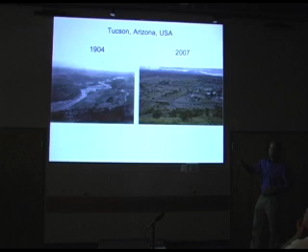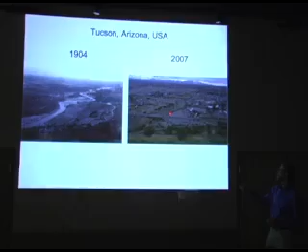That's changed today. This photograph was taken looking south in 1904, and this one is from the same vantage point taken last year. You can see we've replaced the once meandering year-round flow of the river with a dead and dry riverbed. We've killed the river. We've also replaced the sponge of the dynamic mesquite bosques, or forests of indigenous trees, with pavement. Over 30% of Tucson, Arizona, like most urban and suburban communities, is paved over with streets, parking lots, and buildings. But that only looks at the official pavement—it doesn't account for the large swaths of area where we've denuded the vegetation and compacted the soil so much that it acts like an adobe brick patio.

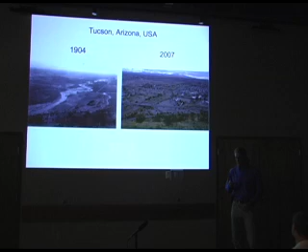So we get much less rain than you all—about a third of your rainfall. We get 12 inches of rain in an average year of precipitation, but we're lucky now if just a fraction of that infiltrates. We are literally dehydrating our watershed. We are creating the desert, because we're draining the water out of the system much more quickly than it would naturally.

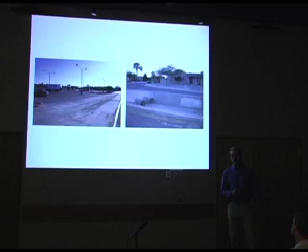So let's look more closely at the watershed. You can see the evidence that we are a hydrophobic society—we are afraid of water because we do everything we can to get rid of it as quickly as possible. A typical commercial development is 95 to 100% paved over. So now you've shed that water out of the system, and you have to invest in pumps and other infrastructure to get the water back to the system from which you've drained it.

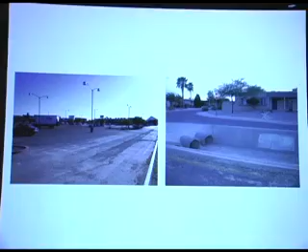Then in a housing development—not as lush as it is in Asheville—here you've got the home on the high part of the property, which is good so it doesn't get flooded. We typically send the roof runoff down a downspout, right past the vegetation of the landscape, into the street, and then into the concrete-clad drainage, and the guns of Navarone shoot the water right out of the system. So we've replaced what was a very vibrant, living system that did not rely upon outside inputs to irrigate and sustain it, with one that is utterly dependent upon human intervention.

It costs us $4 billion to construct that system, and $80 million a year to keep it going. The bulk of that money goes to pay the electric bill, because when you move water, you consume electricity. And because we get the bulk of our electricity from burning coal, we're consuming a half gallon of water for every kilowatt hour of electricity consumed—the huge invisible water consumption of our energy consumption. So if you conserve energy, you conserve water.

Because of our mismanagement of the watershed, where we're first over-pumping and over-consuming our local water resources at a rate more rapid than natural recharge, and then simultaneously paving over much of the watershed and thus crippling its ability to naturally recharge itself, we've got some serious changes going on.

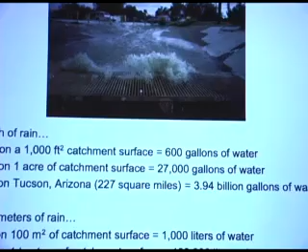So when I talk about harvesting the rain, particularly in the western United States, people typically laugh and wonder what rain I'm talking about. What am I going to harvest? Well, I'm talking about every drop I can get a hold of. So even in the perceived dry community of Tucson, more rain falls on the surface area of Tucson than Tucsonans consume of municipal water in an average year.

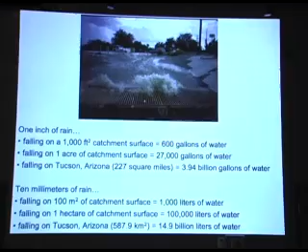So Asheville is well ahead of us on that. Yet how many folks, and how much of the municipality, is looking to capture that water? There's a great abundant resource there to be tapped.

So I see we can take one of two paths. We can take the path to scarcity, where we typically are draining water off-site very rapidly, and thus it's picking up sediment, flooding downstream areas, and we're even taking household wastewater—and this in particular talking about graywater, the water from our bathroom sink, shower, bathtub, washing machine, but not the toilet or kitchen sink. That's black water—and we're sending that out of the system.

So we steadily deplete the local water resources, the fertility of the soil, and so on. Things get worse over time. We're depleting the natural system. We become aware of that, maybe even scared. Maybe even so scared, we're scared to be in the city on the path to scarcity.

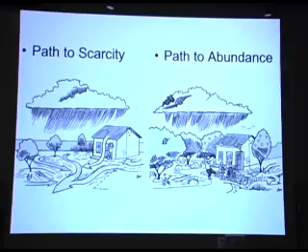So let's look at two different systems: here's a path to scarcity, and one to abundance.

This is a typical housing development, as you see in the U.S. - excessively wide streets. There's no trees planted along the public right-of-way in too many of the new developments. They're only on the private land, thereby expanding the amount of hardscape.

With this, the sun hits the asphalt and hardscape throughout the day. That hardscape absorbs the heat during the day and radiates it out at night. This has caused a 6-degree Fahrenheit rise in temperatures in Tucson, a 10-degree Fahrenheit rise in summer temperatures in Phoenix, Arizona, and you find this pattern throughout the United States. This is not global warming, it's local warming.

It's caused entirely from local efforts, but it leads directly to global warming. Because in the summer, if temperatures are higher locally, you're going to turn on the air conditioner and run it more, or just the fans. You're going to consume power to cool yourself. But by consuming that power, you're burning more fossil fuels and putting more carbon in the atmosphere.

But here in Davis, California, the Village Homes development does the opposite. They purposely put in narrower streets - half the width of a typical development - thereby reducing the amount of hardscape that can absorb that heat. Then they crown it, raising it in the middle, to drain the water to either side into passive water harvesting earthworks, rain gardens, or swales in which the street trees are planted. So the street becomes the passive irrigator of the street trees, which then grow to shade and cool the street, cooling summer temperatures by 10 degrees Fahrenheit.

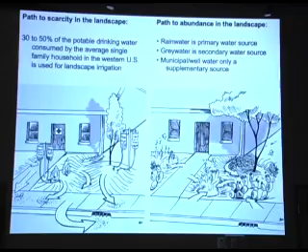I start by harvesting the rain in the landscape because that's where it's easiest to begin, particularly in the North Carolina climate and environment, where you can use passive earthworks or rain gardens. The soil is your tank, the vegetation is the pump. Once you've stored the water in the soil, you access it in the form of peaches, other fruit, passive cooling shade, wildlife habitat, beauty, erosion control, air and soil filtration, and on and on. And it maintains itself once set in place.

Now, I will talk about tank systems and going into potable uses of water, particularly in the two-day workshop later in the week. But I start with landscaping because I like to start where it's easiest, simplest, cheapest.

But let's look inside the home for a second, and let's look at where we consume another 30% of the potable drinking water we consume on a daily basis. This gentleman is drinking from the toilet, just like dogs do.

Both he and dogs know what lies in the toilet bowl. It's drinking water. And what do we do to that drinking water on a daily basis? We put the crap in it. So we have to spend billions of dollars getting the crap back out of the water.

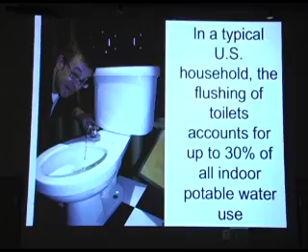Now, I'm going to leave the toilet talk at that. I just wanted to plant a seed and remind us of what we're doing to our potable drinking water sources and why we sometimes have these water issues. So I'd be more than willing to talk to you individually about composting toilets and other strategies to address this, but let's move on to the rain.

So how do we take the path to abundance? I lay out in my book 8 very simple, common sense principles of water harvesting and management. I'll give them very briefly to you here tonight, while it's in more detail in the book.

So the first one is long and thoughtful observation. You guys already know how to do this. You were born with all the skills to figure it out. You don't need school or my book or the workshop, but all that helps. You were born with the senses of sight, smell, touch, taste, the feeling in your gut, hearing.

Use all your senses of observation to get out when it's raining and see what's going on. Where is the rain being lost too rapidly and causing erosion? Change that. Where is it gathering and life is being generated? Build on that. And even when it's not raining, you can look at the tracks.

The next principle, just to move forward, is you want to start at the top of your watershed and work down. All too often, people want to start at the bottom of the watershed. You probably see in new developments that there's a large stormwater detention-retention basin at the bottom.

So what happens in that scenario? The water just flows right off the site, dehydrates the upper portions of the site, floods the lower portion of the site. So then how are you going to get the water back from the low point to the higher point? You got to get pumps, other expensive mechanisms to move that water.

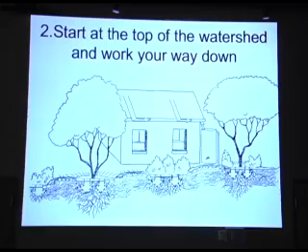This could become a mosquito factory because you've got standing water. And if you have standing water in our area for 3 days, that's enough time for mosquitoes to go from egg to adult. We do not want to be part of the mosquito problem. We want to be part of the mosquito solution. So you've got to bring back the sponge that I mentioned at the beginning of this talk.

So that's what we did. And with the sponge in place, we were able to infiltrate all the water from another 2-inch rainstorm in less than an hour.

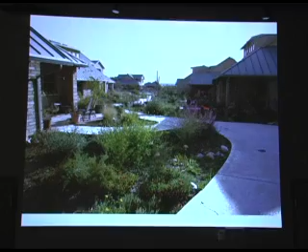Even in a biblical rain, we're not going to have runoff off of this site. But we're going to have a biblical harvest after that biblical rain, because of all the water we're collecting. Hallelujah.

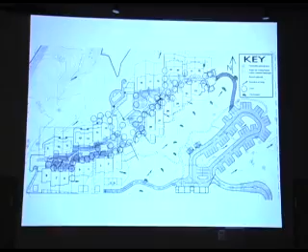There's also no runoff from the parking lot because it's a porous pavement, and I'll show you that in just a sec. But the key here is that integration. The stormwater control system is also the passive and free irrigation system of the landscape that's been designed to not only be beautiful, but produce a bulk of the food for the residents living there. So it's also a system of food security, interspersed with many indigenous or native plants, so we're also enhancing the local ecosystem. Win, win, win. It slices, it dices, it makes your life better.

But the main thing I wanted to say about porous pavements: it's a paving material that infiltrates water, so it does not generate runoff. When people hear about porous pavements, they typically love the idea, and then they misdesign it. They send runoff from other surfaces to it to take care of the stormwater. That is not the intent of porous pavement. The reason for porous pavement is to ensure that the pavement surface itself does not generate runoff. It's not supposed to take runoff from other areas.

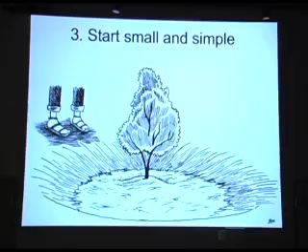Okay, next principle: start with small and simple strategies. Why small and simple strategies? Cheaper. And if it's cheaper, along with smaller and simpler, you just might start. You do something big and complex, you'll probably just keep sitting there thinking about it and never go anywhere.

So starting small and simple could be putting in a rain barrel, or it could be putting in some indigenous vegetation beside or within a water harvesting earthwork or rain garden. When doing such a planting - a rain garden would typically be a level-bottomed, mulched, vegetated area - when you're trying to figure out what to plant within the rain garden or beside it, my answer to that is: go take a hike!

Because a few of you were nodding off back there, so I want to wake you up, but also because I want you to take a hike. I want you to go out in the thriving parts of the local ecosystem where nobody's taking care of it, and see what naturally grows in the low spots that are periodically inundated with water and sediment. Whatever's thriving there is going to thrive in the basins of your rain gardens. And then see what is thriving in the higher, drier, better drained areas - that's what goes beside it, but not within it. And if you're planting exotics, like fruit trees and whatnot, do not put them down here.

Put plants where their roots can access the harvested water, but keep the root crown high and dry so you don't get crown rot.

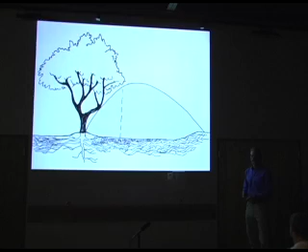So you can have these earthworks and rain gardens scattered all about, and then you just say to the tree, as a water farmer in Africa taught me: look, you are here, but the water is over there. Now I want you to go and get it. And it will.

So where do we want to put these rain gardens and earthworks? I think we need to put these in the oasis zone around the homes where we live. I typically start within a 30-foot radius, because that's where we have the greatest impact on the site, positive or negative, our choice. That's where the runoff comes off the roof, so we can greatly increase the amount of rainfall, and we potentially have gray water, represented by the dotted lines, being the subsurface pipe.

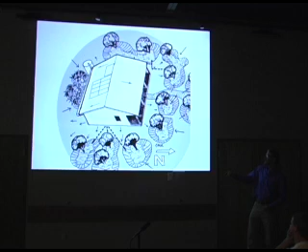In this instance, I would plant higher water use plantings here, where they get rainwater runoff, surrounding runoff, and gray water. My lower water use plants I would put here, where they just get rainwater and runoff from the roof.

This is how we can grow living air conditioners and heaters. At maturity, the trees would look like this - trees are a lot bigger here, a lot of them. So if you've got taller tree species, you don't put them right up against the house; you bring them back and have the lower species here.

This way, in the winter months you get free heat, and in the summer months you get free shading. This represents sun and shadow relationships around the house in the summer months, and this is in the winter months. The sun rises and sets due east and west all year round, right?

No! Awesome, I'm so glad you said no. It only rises and sets due east and west two days a year, the spring and fall equinox. The rest of the time the sun is rising and setting to the north of due east and west in summer, and to the south of due east and west in winter.

Keeping in mind the sun pattern, with trees planted on the east, north, and west side, we're shaded from the rising and setting sun all summer long when we want that shade. But all winter long, the south side of the house gets full exposure to free heat and light when we want it, and it makes solar power and solar hot water heating possible. So you're getting the best of all worlds in all seasons, just by thinking a bit more about how everything interrelates and works together.

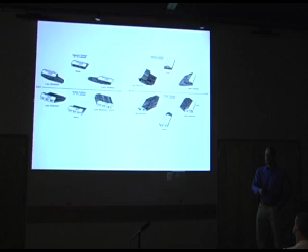So they changed the orientation after I told them this little story, so they oriented it this way. Now they pay less than $50 a month to heat the mobile home, and not only do the pipes not freeze, it's actually comfortable to be in there for a change. And of course, the trees in the pattern I showed you in the previous slide, that just further augments it, makes things work better.

The next principle of water harvesting: slow, spread, and sink the flow of water. We don't want to just send it right out. We want to slow it and spread it and get it to sink into our headwaters. So if you all with me could repeat: slow it, spread it, sink it. Slow it, spread it, sink it. Yes! All right, so let's look at some examples: slowing, spreading, and sinking it.

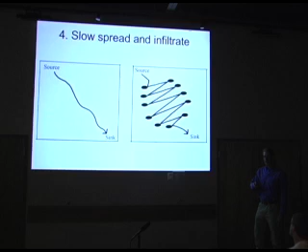So in this example, very rapid drain out of the system, erosive. And on the other one, we've got more forested upper parts of the watershed, slowing it down.

And just to tell you a nice little happy story, I visited the most populated desert of the world, Rajasthan, in 2005. There I went to an area where they had so deforested the watershed and so overpumped the local groundwater that they had killed 5 rivers. So 850 villages came together to reforest the watersheds, to start creating a bunch of water harvesting earthworks and get more efficient in their water use and management. And in about 10 years, they actually brought back all 5 dead rivers.

What country is that? This is India, Rajasthan. And the point of that story, the moral of that story, is what they did is they started to put more water back into the system than they took out. And that's the key to water sustainability.

So here's an urban landscape in Tucson, very small yard. This is the property line. They are taking rainwater from the roof, directing it to the rain gardens here. Then they're taking household gray water and with subsurface pipes directing that to the same basin. So it works in wet and dry times. And it's now irrigated entirely with rainwater and household gray water.

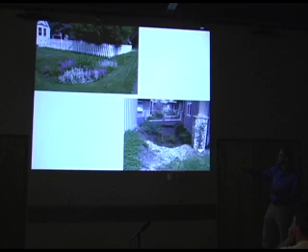Here in North Carolina, from the Cooperative Extension, got these photos. Here are some rain gardens. By depressing this section of the lawn, it's now able to absorb much more of the rainfall, and plant indigenous flowering species. Here's another example beside a building, and reducing flooding at the same time, flooding of downstream areas.

Okay, this is in Los Alamos, New Mexico, on a slope site. You can terrace it out, make these level terraces to slow the flow of the water off the system. And here they use an abundant urban geologic formation known as urbanite, or broken up sidewalk chunks, to make the retaining walls. So it's turning a waste into a resource at the same time. And what I love about dry stacked walls, where you don't mortar up the joints, is it's really good: if your system gets oversaturated with water, it can be released through the joints, so you don't have hydrostatic pressure building up as you would with a mortared wall.

Okay, another example is here. This is in a much wetter climate than you. This is Occidental, California. They get 60 inches of rain a year. This is a swale where the slope's going this way. They made a basin, and then the dirt they dug out from the basin, they made a berm. It's 80 feet long, 2.5 feet wide basin, 2.5 feet wide berm. 12 volunteers built this on a Saturday morning, and this harvests 600,000 gallons of rain a year.

If you were to buy a tank for the same capacity, you would pay about $600,000, because the tanks on average are about $1 a gallon. So I'm just trying to reiterate the point of how key it is to look at the soil as our potential tank, and then the vegetation is the pump. I will get to tanks, but the reason I'm pushing home this whole idea of the soil is all too often when we think of rainwater harvesting, we go right to tanks, and we forget the cheapest and easiest.

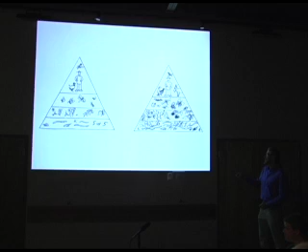The idea here is the more organic matter we have in the soil, the organic matter in the soil is the food for all the soil life. And the more soil life, the more life we can generate atop the soil. And where do we live? We live atop the soil, so that's good for us.

So the next principle: we want to maximize the beneficial relationships. We want to set up these systems so they do more than just harvest water - they're more dynamic. So if you put in a rainwater tank or a rain garden with some trees, place them on the east or west side of your house so they passively shade and cool you from the rising and setting sun in the summer months.

Hey, living air conditioner. Set up vegetation that not only looks good, but also produces food - an on-site pantry - and is also great for wildlife habitat, enhancing the ecosystem. The tank and the earthwork on site act as community flood control. In Los Angeles, California, they're actually subsidizing these systems in schoolyards and private property, taking the money out of the flood control district to do it, because the more people that harvest water upslope, the less flooding there is downslope.

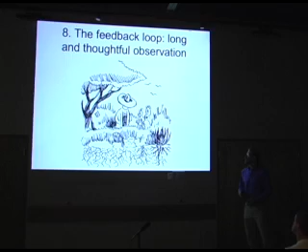Now I just want to show you a few more examples. Gray water harvesting: gray water is the water coming from your shower, bathtub, washing machine, but not the kitchen sink, dishwasher, or toilet. That's considered black water, and there's more health risks with that. But gray water in Arizona and New Mexico is legal statewide. Not only that, both states will pay you to do it—you can get a $1,200 tax credit if you start. So maybe push local authorities to do the same. I list all this on the gray water harvesting page of my website.

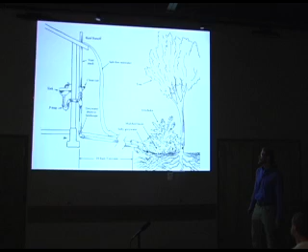I want to say one other thing about Arizona and New Mexico. If you harvest gray water according to the best management practices, which I list on my website and which the state advocates, you don't even need an inspection. There's no permit and no fees.

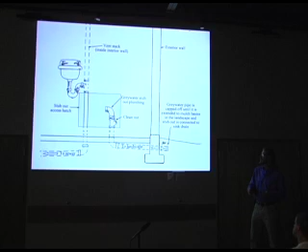I want to entice more people into harvesting gray water, and I think the key to that is the gray water stub out. Cottonwood, Arizona, Sierra Vista, Arizona, and it looks like Tucson, Arizona will soon follow suit, mandating that every new home be built with gray water stub outs. That's just a section of pipe put in when the home is built, so you can come back later and connect it to the gray water system to send the gray water out to the landscape.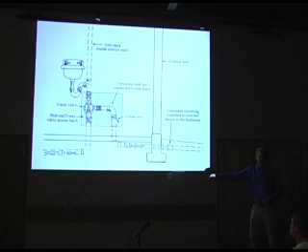So this is what it would look like connected. There's a little three-way valve. If you're using the sink with bleach, you send that water to the sewer because it's toxic — you're not going to contaminate your own landscape, you're going to contaminate the community landscape.

Then when you're using the good stuff — the right soaps that are food for the plants and don't kill anything — you turn the valve and send the water to the landscape. This way, people don't have gray water paranoia.

All too often, people have the paranoia thinking that starting to harvest gray water means a major lifestyle change. This way, you don't have to. You can continue to use those favorite toxins and send the water to the appropriate place, then slowly start to educate yourself about what still works for you but isn't toxic for you or the environment.

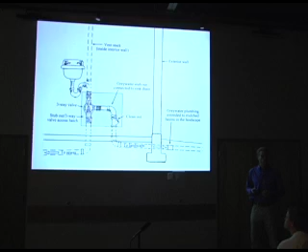It's also key to make this look good. This isn't the best looking thing — this is a retrofit — but it's key to mark where the water goes at the valve, so you know which direction to turn it when you're going to use bleach.

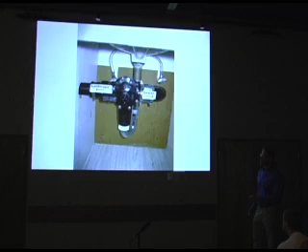To make it look slicker, I like this installation coming up. Here you walk right into the bathroom and think, man, these people harvest gray water — you want to give them a big hug and a kiss, because that's what happens. When you start harvesting gray water, you get excited about it and want to do that with other people. Just trying to lure you in even more.

Here it's marked landscape or sewer — they can mark it whichever way. If they want to celebrate it, it's out in the open, but if you don't want to look at it, you can put it in the cabinet so no one sees it.

Now another installation I'll show you — they put in a bathtub and raised its elevation so they could put in a trap door for the valve. Let's see, I think my batteries are dying.

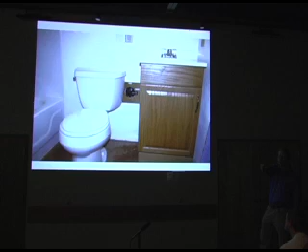So the height, they raised it to match the height of the tile, and they reach in there through a trap door. When they want to move the valve — which isn't that often — there it is, you can see it. All right, thanks, John. So, next one.

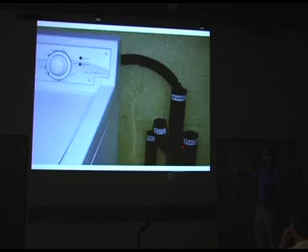This is a great thing to do for a washing machine. This is my brother and I's washing machine, out on the back porch. Every time we're loading the clothes with wash, we grab the drain hose and stick it in a different pipe, moving it in a clockwise fashion every time we do a load of wash.

What I love about this is it gives you a lot of control, and I am a control freak when it comes to gray water harvesting. If I notice the orange tree needs extra water, I want to be able to leave the hose on there to give it extra water.

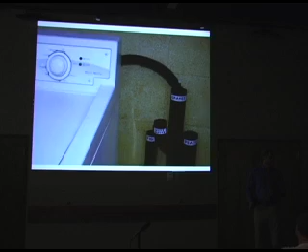If you have a more conventional system, you can set it up so we've got the drain water pipes going to the various fruit trees, the gray water pipes. But if you're going to use bleach on occasion, you have one more pipe that says sewer. So again, you've got all options. And when it says sewer, in parentheses say local groundwater table, local creek, just so you keep that in the consciousness.

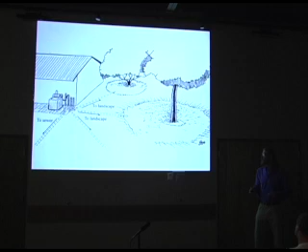Now here's how you can set up a graywater basin that you don't see, or how you can turn your septic system into a more sustainable irrigation system. So this is a septic leach field. Instead of a 4-inch perforated pipe in a gravel-filled trench, this is an infiltration chamber. And what that looks like on the inside is this.

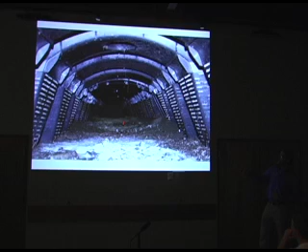The really good models are 3 feet wide and a foot tall, so it's this huge void space where it's harder for roots to grow into that and clog it, because it's much bigger than that 4-inch perforated pipe. So no bottom, louvered sides, the water perks out real quick. And the key thing is we don't want this any taller than 12 inches, because we want to infiltrate that water in the highest part of the topsoil where we have more root life, more soil life using the water. If we discharge it too deep, we're not using it, and it's more likely to contaminate the local groundwater table and so on.

So if I go back, you could plant fruit tree, fruit tree, fruit tree. Not cottonwoods, not sycamores, not stuff that grows in the creeks and running water, that could clog it. But the fruit trees you could plant on either side, so your wastewater then becomes the free irrigator of those trees.

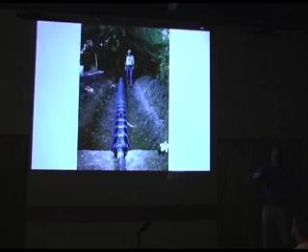I think we need to reconnect. Where does our water come from? But we also need to reconnect with where does our water go to.

So this is how we've started to convert the public right-of-way. You start to get it happening on your land, work out the kinks, get it working right, and then spread the word. Spread the activism.

So this is the public right-of-way, a 20-foot right-of-way between our property line and the curb when we bought our property in 1994. Two years later we started planting. We organized an annual tree planting project. We've planted, or helped our neighbors plant, over 1,100 trees in our neighborhood since 1996. And we try to get people to plant the water before they plant the trees by creating these rain gardens first.

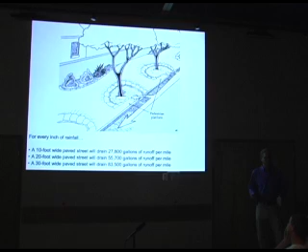We are now building community. The neighbors love to walk up and down here. They consider it the neighborhood botanical garden. It's leading to cooling of the neighborhood as we get more vegetation, a lot more pleasant to be out and about. And it's community flood control, because what we realized is that the streets are ephemeral waterways. When it rains, the streets flow with water - they are creeks, ephemeral creeks. So let's treat them as such.

So we started to cut the curb to get water from the street into the street-side tree basins, because the street is raised in the middle and drains toward the adjoining sides. It's amazing the amount of water you can harvest.

The average residential street in Tucson, about 36 to 38 feet wide, drains 1 million gallons of runoff per mile per year. Now look at Asheville: a much narrower street, 20 feet wide, drains 2 million gallons of runoff per mile per year. So you can see the literal dehydration of the community happening through our public infrastructure.

But we can flip that around and send the street runoff not down the street, but into street-side rain gardens and plantings. So the street irrigates the street trees, and then you don't get the flooding downstream like before.

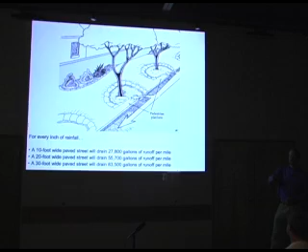Let's look at how some communities around the country are doing that.

Eat your rainwater—that's what my brother's doing. That was grown with rainwater. Here's my sister-in-law eating mesquite pods grown from the native food-bearing mesquite tree, grown in the street-side basin with the curb cut irrigating it. This tree was planted 10 years ago, and now we're eating the produce. We also get honey from our backyard bees, syrup from cactus fruit, mesquite flour that we grind up, European olives, and other goodies, all grown on rainwater in the public right-of-way.

So here's food security going on. We want to get more people enticed by this.

It's hard to grind mesquite seed pods into edible flour on your own, so we got a hammer mill and put it on a trailer so we can take it around to different neighborhoods. You can grind 5 gallons of whole mesquite pods into 1 gallon of edible flour in 5 minutes, and it sells for $9 to $15 a pound. It's an amazing cash crop. What's more, it's naturally sweet and slows the body's intake of sugars, so it's great for people with hypoglycemia and diabetes.

But that's not enough to make it easy to do—you have to get people to taste it, to see how good it is. So we celebrate around this with a mesquite pancake breakfast with prickly pear syrup. Guys like Garth try it and get all excited, like 'I want more of this.' Great—plant a tree and a water-harvesting earthwork and do it. Then they come back the next year with the mesquite pods. So each year it's growing the communities we go and do this in.

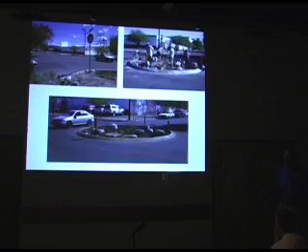Then we wanted to celebrate this, so we got the neighbors out to help paint the intersection. This is like what's going to happen in June with the Asheville Convergence. You can get more information at ashvillage.org.

We had live music going on, food, and here's what it looked like afterward. This intersection really slowed traffic at this point because it represents the prickly pear through the four seasons—flowering, fruiting, and so on. It's great.

All these people passing by would see the traffic circle planting and wonder what it was. People would stop and gather, and everyone who worked on it would come together too. It was amazing, and then things like that kept happening.

Unfortunately, we used the wrong paint, so it faded after a month. So my advice to you all is: use the right paint.

The other thing that happened is we got these murals happening on the auto parts store. It just starts to grow things—you plant that seed and it just starts to grow out.

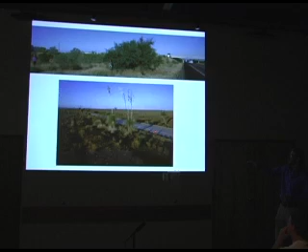Next, let's mimic natural patterns. You can see, particularly in our area, that you have taller vegetation beside hardscape areas like the streets because it gets rainfall and runoff. In a very dry area, the only place you get taller vegetation than scrub is alongside this dirt road—so we're just mimicking natural patterns.

Here in this neighborhood in Tucson, they have pullouts with a flush curb, so the water just flows over it, and this forces traffic to meander. So you can plant in the street and use the street to irrigate the plantings.

This is in Portland, Oregon, so closer to your climate. Here, this is a city-funded project. Now, a lot of the stuff I've shown up to now has been citizen-driven—the neighbors wanted to do it, so they made it happen, getting grants or working with the city for money.

This is different—in Portland, the city drove it. They got a progressive mayor and council who wanted to see this happen in neighborhoods like this. They had a lot of flooding problems with basements, so what they decided to do is start to capture some of the runoff higher in the watershed.

So you can see the strip of lawn here—that's where the curb used to be. They put the curb out, cut the curb, so now the runoff from the street goes in to irrigate this beautiful rain garden. And they're putting them all throughout Portland.

And they start high in the watershed, not at the low point, so they can slow, spread, and sink it throughout. They've started in the neighborhoods where flooding's been a problem, so not only does it beautify the area, it combats flooding at the same time. They can take money out of the flood control district to help pay for this, so flood control and transportation departments work together.

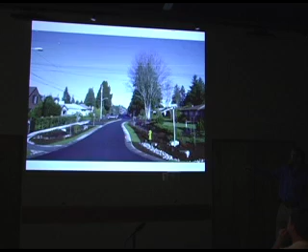It's a flush curb, so you don't concentrate water and make it more erosive. We keep sheet flow.

A couple of years after this was done, this is what it looked like. Unfortunately this is a bad photo because there are a bunch of people, but they're way back there. There are people all over this place when you go to the neighborhood because they love walking around. It's much more beautiful, and it's starting to cool the area in summer. The other great thing is they have reduced urban runoff by 98%. And this doesn't cost any more money than a conventional curb and gutter system, but it's got so many more benefits. It's taking the path to abundance, not scarcity.

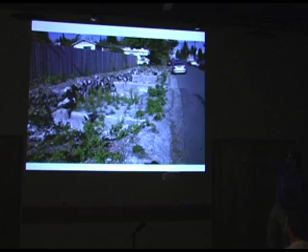Abundance, okay. So on a more steep site, here's the drainage coming down. So they made a bunch of level terraces with check dams. A year later, this is what it looked like.

That is the living filter, the living sponge, the bioremediation. We're going to living systems here. They've so improved stormwater quality that the salmon populations are rebounding in the local creeks, whereas before they were dying off because with the urban runoff, it was like a Valdez oil spill every time it rained, just from the oil in the streets and stuff.

So the idea is, raise your access ways, sink the planting areas, and plant within or beside them. In your climate, you probably won't plant in the middle of the trees, you'll plant right here on the edge.

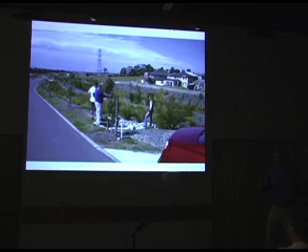All right, much more arid climate. Put in a 1-rock check dam, keep it small and simple. It's only 1 rock high but 5 feet wide. It slowed the flow enough in this eroding drainage so once the rains came, all this green was established. That is something in my climate, that's amazing in my area. Just by slowing the flow of water, you can generate that life.

This is a ranch in southeastern Arizona. When these ranchers bought the ranch, they wondered, what do the cattle eat? It was just bare bedrock everywhere, the erosion had been so severe. So they put in a bunch of check dams in the drainage, no taller than this. They put in 20,000 of them on 2,000 deeded acres. They slowed the flow of water enough that soil started to gather. He's pulling up a carpet of soil and grass that didn't exist before.

These check dams spread the flow of the water over more of the drainage way, so you get more soil-water contact, more infiltration of the water, slowing it down.

And this has resulted in changing 2 creeks that only flowed a couple months out of the year to year-round flow. People hear about this and say, yeah, but you're robbing the water from the people downstream. Actually, these ranchers' well levels have gone up, and so have all the well levels of their neighbors downstream, because they're putting more into the system than they take out of it.

And the key to this, as with all of it, is you start at the top of the watershed and work down. So they started up there and worked through all the sub-drainages feeding it.

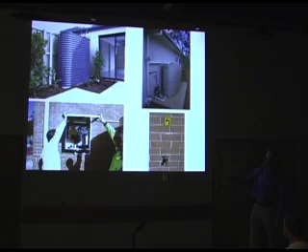And you'd use these tanks for multifunction. These tanks are all on the property line as a privacy screen. Or you can use a different style—large cylinder tanks—as a privacy screen along the property line for the deck. So it can look good too.

Big image must be coming up. And this is in Seattle, Washington. More celebrating of the rain.

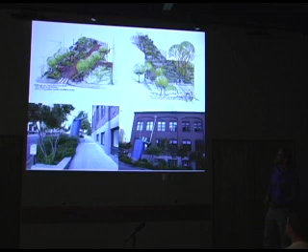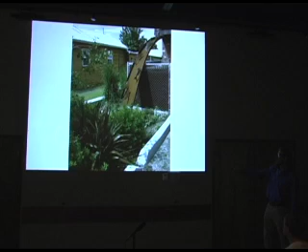Okay, next slide. It's bringing back the natural hydrology of the urban core. Steelhead salmon have returned to Portland, Oregon, as they swim up the steel downspout in front of an office, insurance office, and the water's caught in the rain garden below. Next slide.

Next slide. But the most juicy part, I think, is this character standing right outside the coffee shop and patio. So this is the downspout coming off the roof with little steel clouds around it. And this is a massive shower head. So when it rains, it showers down on this guy made out of recycled parts.

And the water is caught in the rain garden below. But as it goes over him, he's got this umbrella made out of old propellers. And it's kinetic, so the moving water starts to whip this umbrella around. And all of a sudden, he's doing this little dance. This little abundance dance.

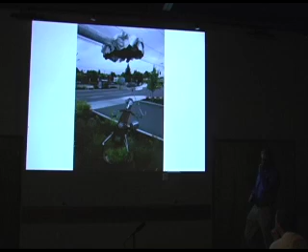So jumping back to a drier climate, if we start creating more of these rain gardens and whatnot, if we start conserving more water with tanks, so we're using rainwater rather than pumped water and the municipal water, we're going further so that we're able to rehydrate our local water resources rather than dehydrate them.

So we really, I think, as we deplete our local water resources, as we contaminate our local water resources, the low-lying fruit, the shallow water table that's so easy to access, we're losing the ability to cheaply, efficiently, and joyfully access the water in this sense. So all the strategies I've been talking about help us flip that around. Not contaminate, but regenerate. Next slide.

Okay, so to wrap it up here, I've shown you a lot of potential. If you come to the 2-day workshop, we'll go into a lot more of the details of how you realize all this. But to really be water sustainable, you want to live within a site's water budget.

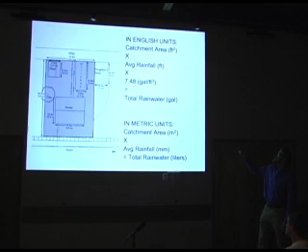You do this simple calculation: length times width of your site in feet gives you square foot, gives you the area in square feet. Multiply that by annual rainfall in feet. Here it's 3, because you get about 36 inches of rain. Multiply that by 7.48 to convert cubic feet to gallons. That is your site's water budget. You don't want to consume more water than falls on your site.

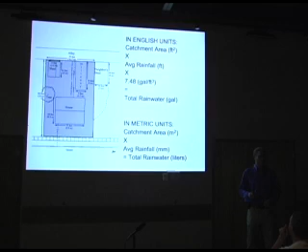Next slide. But you got to take it a step further. See, are you losing water to runoff? You got to subtract that from your budget. Are you gaining water from run-on, water running onto your property, and you're keeping it on property? You can add that to your budget.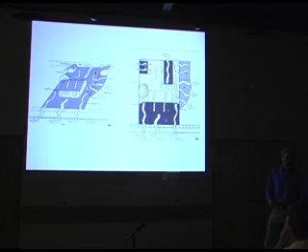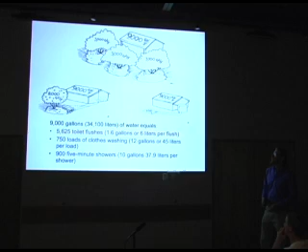Next slide. And to move away from the math, because people get blurry-eyed on that, let's make it visual. Let's say you've got 9,000 gallons coming off your roof in an average year. And you guys got a lot more water than that coming off your roof, because you got a wetter climate. But in my climate, if you had 9,000 gallons coming off, that would be enough to sustain 3 low water use native shade trees, 20 feet tall. And you could just use gravity to send it to the rain gardens, no moving parts.

But if I wanted a higher water use plant like a citrus tree, I'd need to supplement that with gray water in the dry times, because in my climate, the fruit trees aren't adapted to the drought in the dry season. And if I wanted a lawn, that's all I'd get. Okay?

This is trying to get the relationship, the feedback loop of how it all works. Now, how do you get more for less? What if I want these trees, that fruit tree or the lawn, with my 9,000 gallons of water, but I want more than that. I want more than just irrigating the vegetation.

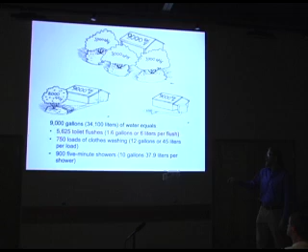What if I want 750 loads of clothes washing? Well, if I send that roof runoff first to the clothes washer, and then the gray water from the clothes washer to the landscape, I get it all! And what if I don't want to wash my clothes? I just want to shower. I get 900 five-minute showers with that 9,000 gallons of water, and I still irrigate the landscape.

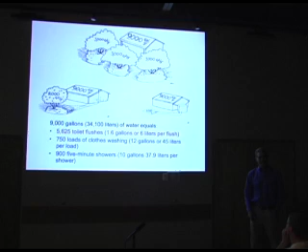Yes! Okay, next slide. So integrate your rainwater and gray water harvesting. And it all begins with conservation.

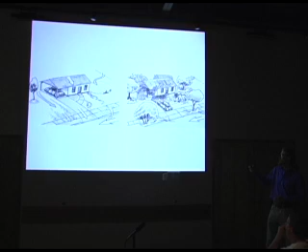Reduce first. Let's say you're a high water use household using 370 gallons of water per person per day. You'd only have 24 days of water with that water coming off your roof. But if you can conserve and only use 114 gallons of water a day, you get 78 days of water.

But I don't really think that's conserving. 20 gallons per person per day, now that's conserving, and it's easy to do actually if you get the efficiencies in. You do that, and that 9,000 gallons of water coming off your roof will last 450 days.

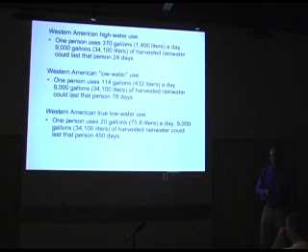Conservation first. So then to finish it, the idea is we want to move away from the scarcity to abundance. I've shown you guys a lot of ways to do this.